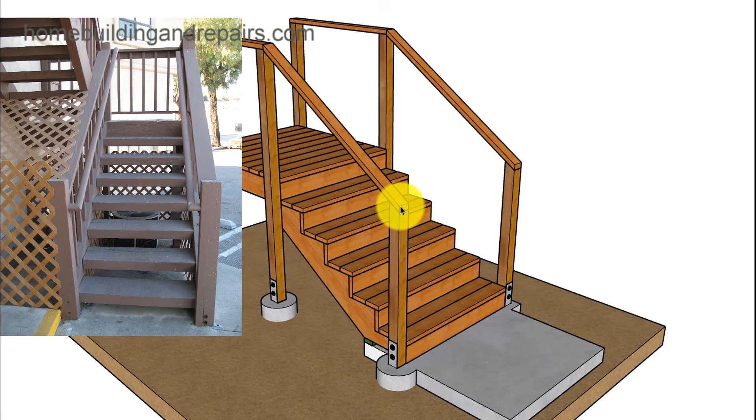Now, I have come to plenty of stairways where they just simply attach a post down to the concrete with a small base, maybe a standoff base plate, or put a strap across to tighten it in, or maybe even a framing anchor. Whatever they do, it creates a weak post, a handrail that you can actually move. Some of these I've seen where you can move them about 6 or 7 inches in either direction. They're brutal. Now, is this going to be a really big problem? I don't know. If nobody ever falls down the stairway or puts any pressure on it, then I would say no. The building inspector, however, is probably going to think a little differently.

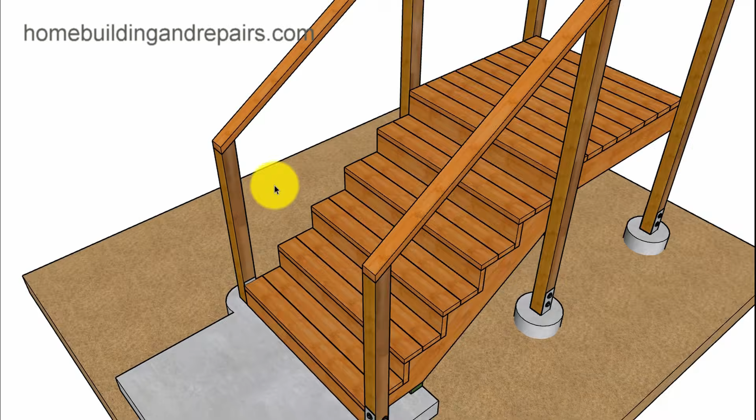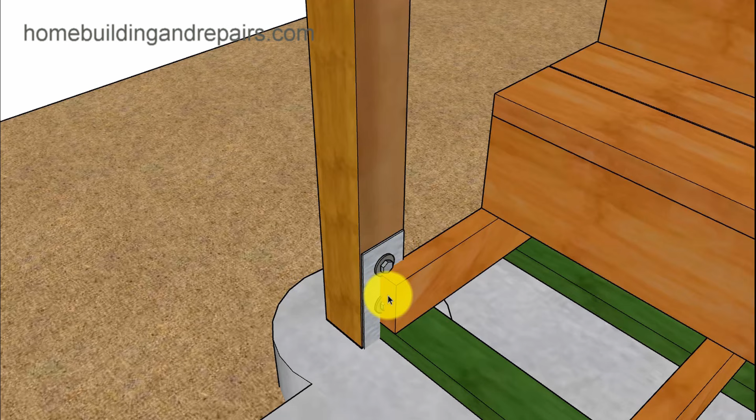So let's go ahead and take a look at the first problem you could run into, and that would be the position of the base hardware. You can see here where if you have it in this direction, you could have a problem. You might have to notch your stringer around it, and you're not going to be able to drill a hole through it. But if we rotate it 90 degrees and put it in this position, then you can see here where we'd be able to drill a hole through it and provide a stronger connection for the post and the stringer.

Now, I also need to point out that the corners of the stair stringers can break off. If you think about it, the grain of the wood is running in this direction, and that's usually where it cracks. I can't tell you how many stair stringer tips I have broken off, and I just simply nail them back on. When I was doing a lot of tract work, I just nailed them back on, and that was the end of it.

But as we use the corner of the stair stringer, you need to be aware of this. If you take this all the way to the top here, and you put enough pressure on it, even if you have your treads and risers nailed or screwed to the stringer, you can actually break it. It's a weak point you need to be aware of when installing your lower post for your deck stairs. You can also see that the bolt isn't centered, it's off a little bit so that it can connect to the stringer.

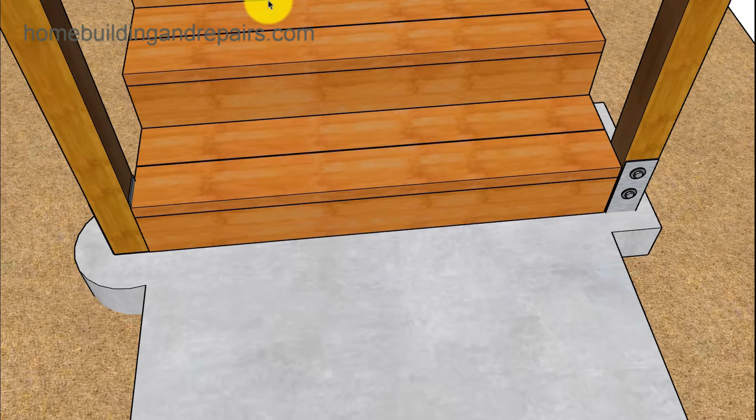So let's go ahead and put our treads and risers back on to give you an idea why I located the post, or both of the posts, in these areas, and that was to make sure that they lined up with the tread, or the riser, front of the tread. You can locate these posts wherever you want to. I'm just giving you an idea of what it would look like if you lined it up with the first riser or the bottom step.

In our next example, I'm going to go ahead and rotate the base plate here 90 degrees so that it is just like this one here, and we can drill a bolt or a hole through all of the stringers and the post so that we can run an all-thread through there. Don't forget, your all-threads come in different sizes, and you can use connectors to screw them together. So if all you have are 2-foot all-threads, you can get a couple of them and use the connectors to fasten them together and make them as long as you want to.

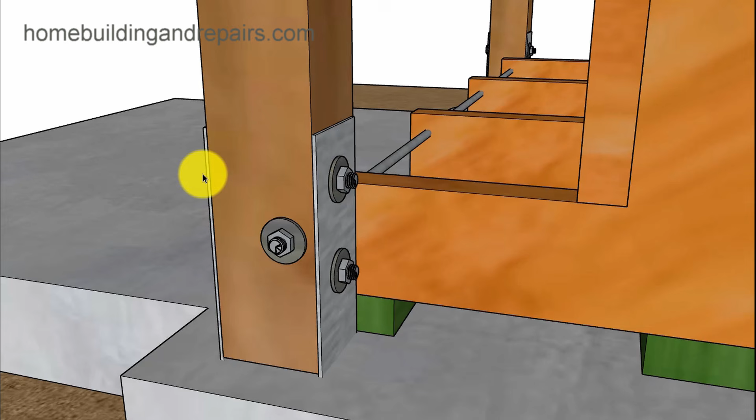Again, this is a simple and easy method that you can use. Is it going to create the strongest post support? No, it's not, but it's going to be stronger than the one we just looked at. And of course, another thing you need to take into consideration with this type of design is to make sure that the bolts do not interfere with each other.

Just another thing on the long list of things to keep in mind, possible problems you could have. Imagine the bolts here being a little lower, or this needing to be a little higher, and you think you're ready to pre-drill your stringers, and then realize that's not going to work.

You could always line all the stringers up, stack them on top of each other, and drill a hole through all 4 of them at once. That would be an easy way to do that. Just make sure the holes or the bolts aren't going to create a problem.

Let's go ahead and put the post back on there, give you another view of it. Next up on the list, 2 more examples.

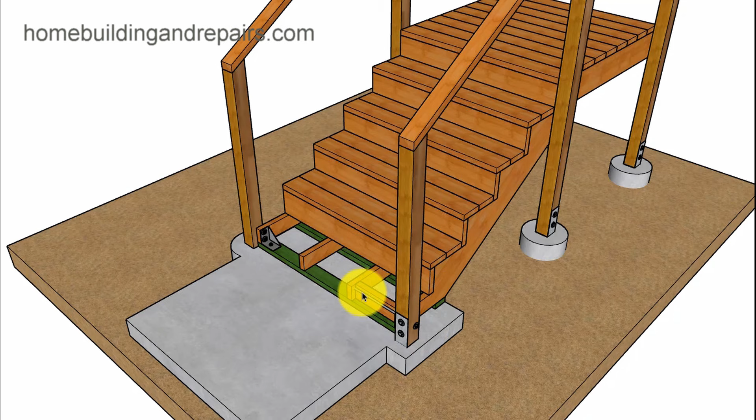One where you're going to have a shorter all-thread and a block, using 2 of the stringers. Same method, just shorter - you're not going to have something running all the way through. And of course a heavy duty angle bracket.

You might have to have something made if you can't find one. This one has another section added to create a little more strength. If you just use a lightweight angle bracket, when you put some pressure on this, it's going to move, so heavy duty is the key. Also try to get the bolts spaced as high as you possibly can for the most support.

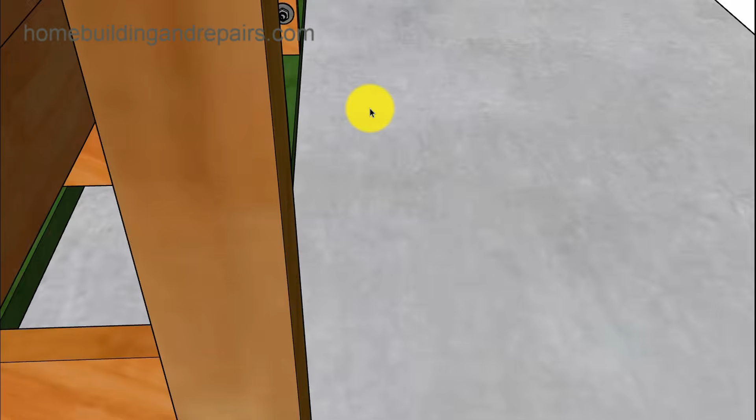An example of what we're doing here: stopping the all-thread a little shorter, putting a block in here to provide more stability and create a stronger section. Here you can see where we're going through the 2 stringers. This right here is going to be a nice support.

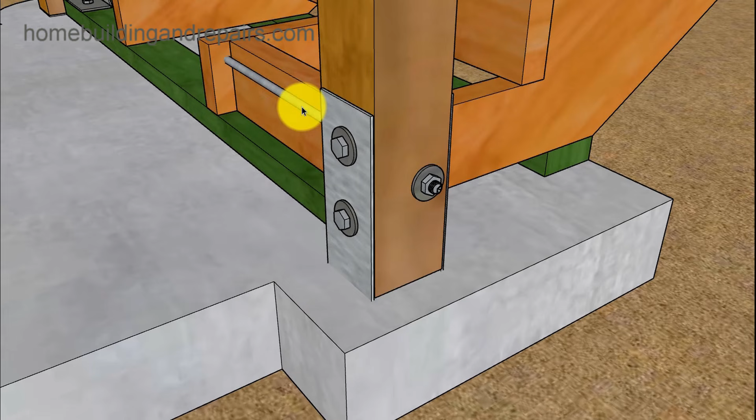I've actually seen them do stuff like this with hold-downs, and I might make another video on that to show how it's done. I'm not going to use that in this video - it doesn't seem like it's going to be as good as moving the post back a little bit.

But again, it's what type of design you're looking at. If an architect comes in and says, hey, I want the post right here, you're not going to have a lot to work with. Here's what I'm talking about - moving the post back a little bit so you can use more of the stringer, more to work with instead of this little space of 4 or 5 inches.

If you have a 6-inch riser, something like this is going to be 4.5 inches - that's not going to be a lot to work with. Even if it's 7 inches, you're still looking at 5.5 inches for this. So this is why you move the post back.

You can double block it on each side with something like this, and again you can see where you can run the handrail, top of the board, through. It's going to be like a cantilever. This post is going to provide a stronger handrail, something that's not going to move as much, and it's going to cantilever over here and pick this post up.

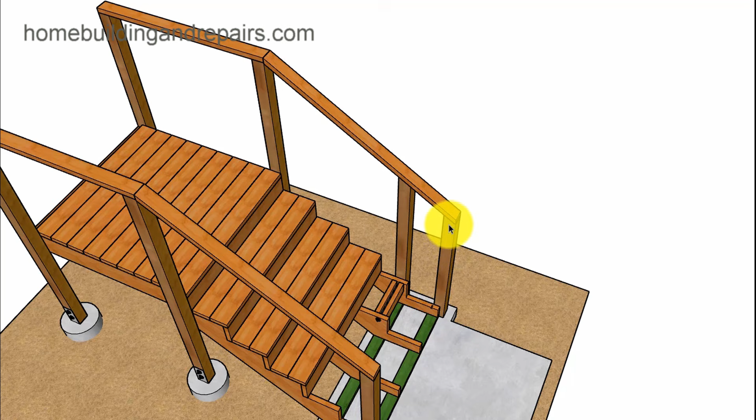Now you can always add something to provide a connection to make this a little bit stronger. But if we don't use this and just use this one here, bolted however we want together, there's a good chance you're still going to be able to move this. When I go up a little further like this and have more of the stair stringer to bolt it to, it's going to be a lot stronger.

So this would be the way I would build something like this if I needed it to be strong and wasn't involved with some type of designer. You can make your suggestion to an architect or designer, but they might not want it - this does not look that attractive to have a post set back a foot or 16 inches and then another post in front of it. It doesn't look as good as having a post at each end and then all of your balusters in between.

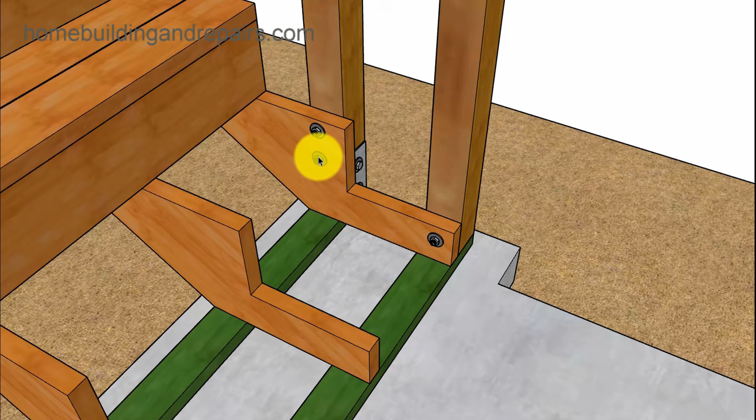Here we can see where we just simply bolted the post to the stringer. You're going to get your strength, and it's not just in the stringer. Once you nail your treads and risers to the stringer, you'll get a little more strength out of it, so you can just bolt it. You don't have to go with the all-thread, and you don't have to tie to the other stringer. And then, of course, bolt the bottom to the post also to get something a little stronger.

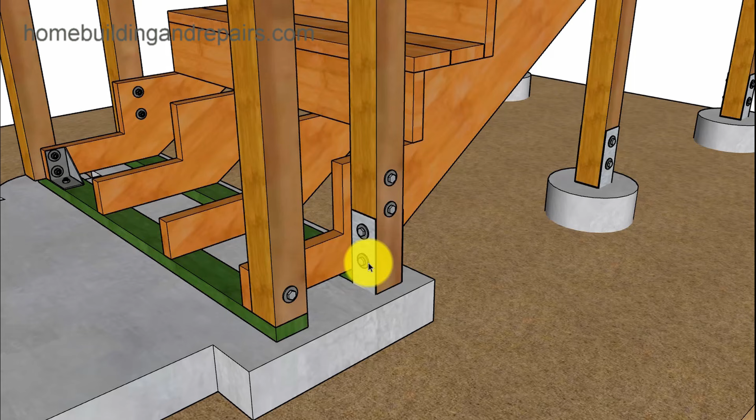Give you an idea what the post base looks like. I'm also going to show you what a standoff plate would look like. So again, pay attention to what I did here. I'm using the 2x4 for the treated, and I'm extending it past.

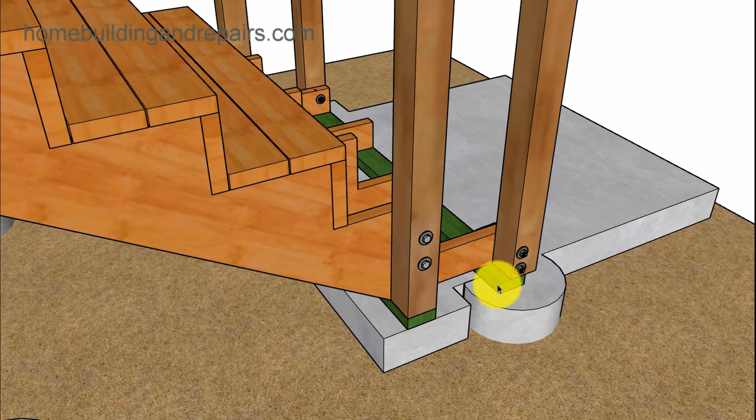And it's working fine for the back. So instead of having a base connector, I just went ahead and ran the treated past. And this one here doesn't look as good, it's a little off. But pay attention, I'm going to fix that here in a second.

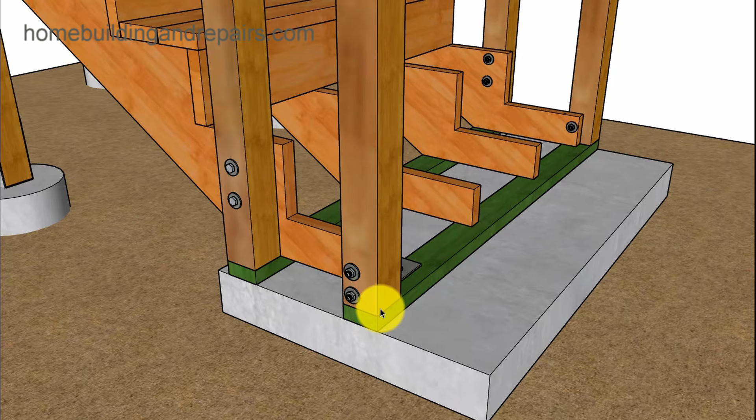So this one right here, it's back because it's even with the front of the stringer. But we can solve that problem by moving the treated forward, and then we're going to set our riser on top of it instead of in front of it. So again, we're redesigning the handrail system, the stairs, so that the post can sit on top of the treated. So both of these are running through and lining up with everything.

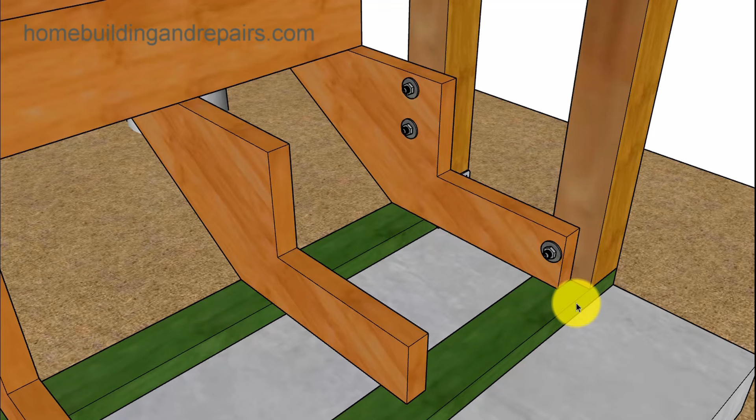And you have your angle bracket here. And of course, before we had the angle bracket on top of the treated. Here we have it moved over a little bit, but something like this is still functional, still could work. Same situation here, moved it forward, give you an idea. The post is in the same spot as it was before.

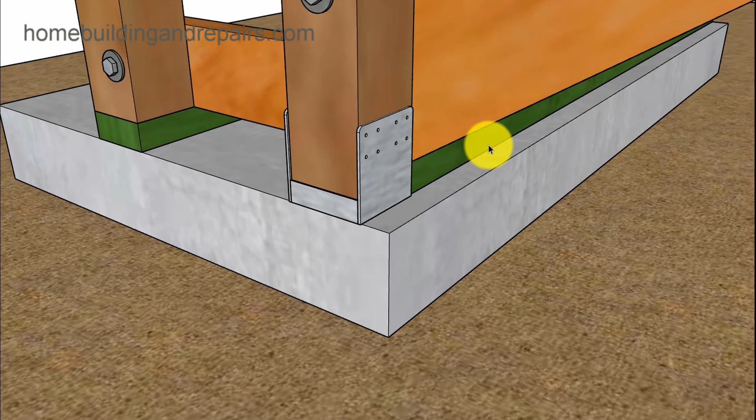Bolted in, and here's our standoff base plate. A lot of people use these, I like using them too, but I wanted to throw it in here to give you an idea of what it would look like if you didn't want to run the treated through and use a standoff plate instead. This could be a problem depending on how much rain and snow you get. You might want to use a standoff plate, or you might want to use the heavy duty base plates or base connectors instead of running the treated lumber through, so you don't have to worry about stuff rotting and deteriorating. So again, these are just suggestions.

Let's go ahead and put the treads and risers back on to give you an idea how it sits on top of the treated. If you don't like this look, obviously you're not going to do it, you'll have to choose one of the other methods. But here we can see where the riser still lines up even with the front of the post, just sitting on top of the treated.

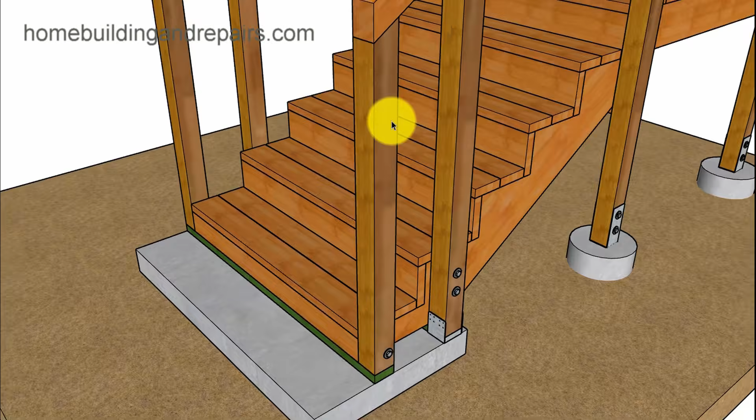Now, another thing I want to point out is that you can always use thicker handrails for the top plates. Here I have a 2x4, but you can always use a 3x4. If you're looking for a little more strength, and maybe you're going to move this back a little further to create something, because you just don't have enough lumber to attach it to, you've got to move it back to the third stringer or something like that. Then maybe a 3x4, and you could always shape it.

You could router the top or put some shaping in it, but you're going to have a stronger board than a 2x4 when you go to a 3x4. And of course, a 4x4 would be stronger than a 3x4. Just another idea of something that might provide you with a stronger handrail.

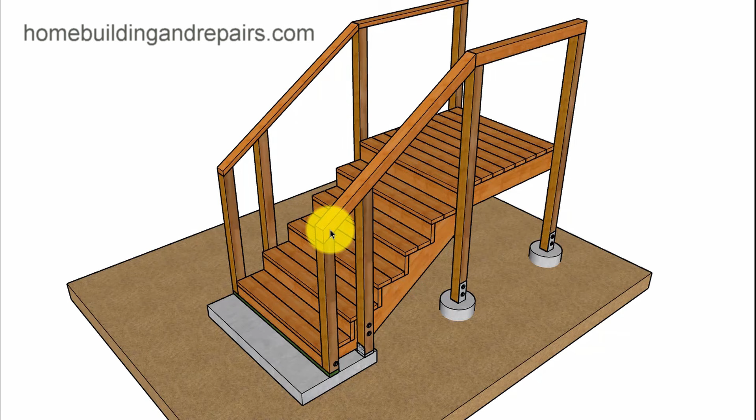Now, that's it for this video. If I do make another one, and I am pretty sure I'm going to make one eventually, I will put a link here to it and give you a few more ideas. There are a lot of different ways you can connect the bottom of these posts to the stairs to make them stronger. It's just that some of them don't seem to work as well as others.